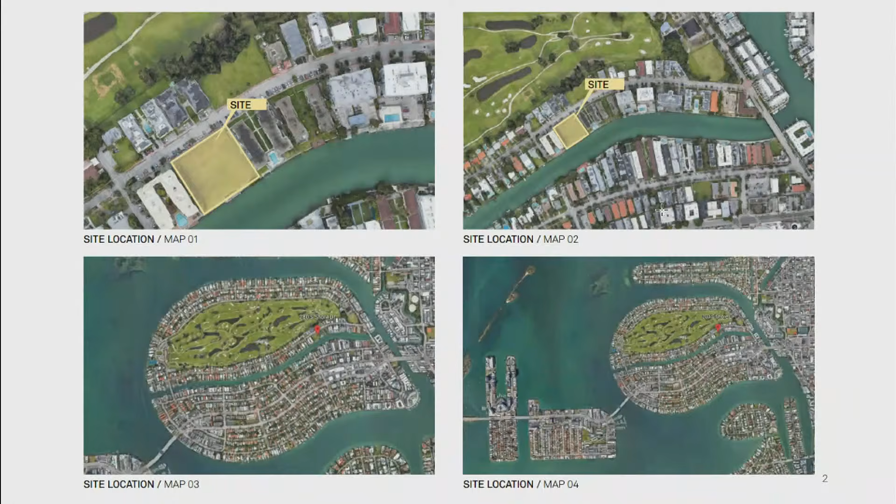So as staff mentioned, this was approved back in 2022. It is an affordable housing project located on Normandy Isle, very close to the golf course. One thing that's unique about this is that it presents an opportunity - affordable elderly housing, waterfront, with modern amenities - which is something people don't really get the benefit of often. Here you see a little bit better where the location is. And I will let Jeffrey walk you through the project.

One thing I do want to point out is that this is the most significant investment in affordable housing for our elderly population in almost 50 years. Based on the data I was able to review from the Miami Beach Housing Authority, the biggest affordable housing project for the elderly was built in 1979 - the Rebecca Towers, about 400 units. In the almost 50 years since 1979, we've only been able to add about 60 more units. The Vista and Breeze projects combined offer 119 affordable housing units for the elderly. So this really is the most significant project we've done for our elderly population.

And it's a modern, contemporary build. It's an opportunity for people who would otherwise be priced out of the city to continue to live in their communities in a very dignified manner. This is a very important project, and I'm very proud to be representing them today. And with that, I will hand it over to Jeffrey to talk a little bit about the design.

Thank you, Madam Chair, board members. Jeff Huber, principal with Brooks Scarpa Huber Architects. I'm the architect and landscape architect of record on this project. The building is carefully thought about around all of its edges, around all the open spaces. I can get into a lot of the details, but we did work with FPL from day one to design this - the issues came about when the inspectors came on site. The building was designed as a public-private partnership, as Cecilia mentioned, with the Housing Authority of the City of Miami Beach. It's providing 70 permanently affordable homes for elderly residents who are going to be able to remain in Miami Beach and invested in their community.

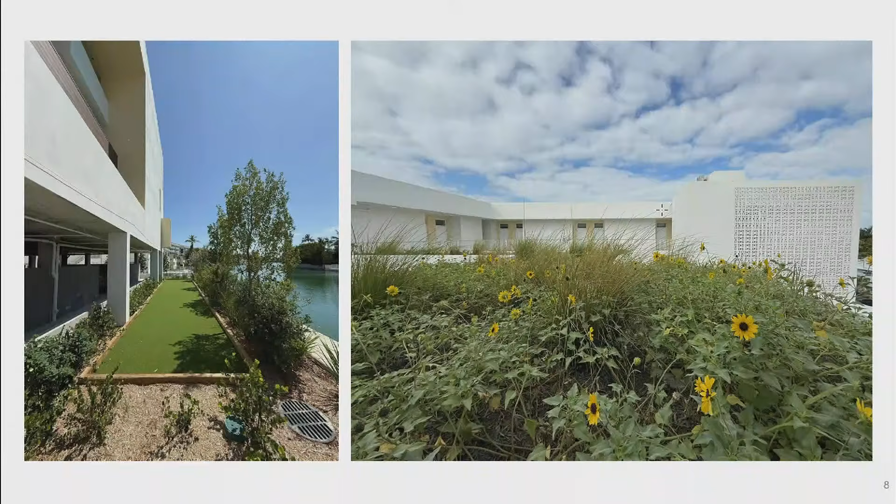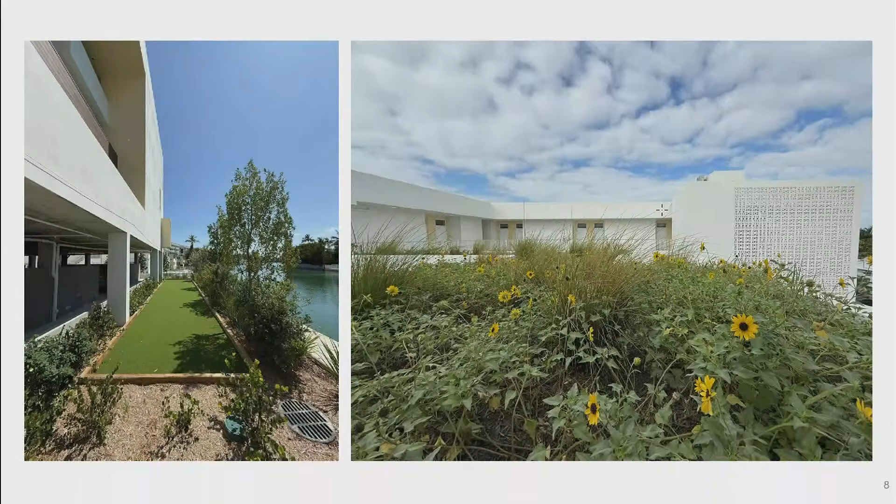These exterior spaces are also equally important. Courtyards, shaded walkways, gardens, and seating areas create places for conversation, rest, and recreation, and the landscape includes drought-tolerant, salt-tolerant species, pollinator planting, and habitats for native flora. These spaces support both environmental performance as well as physical and mental well-being of the residents.

So the project does advance a lot of the city's goals, and I'm going to hand it back off to Cecilia to talk through those.

This project directly implements some of the goals and policies in the city's comprehensive plan, which encourage the development of affordable housing. Other policies also speak directly to providing housing to our vulnerable populations in proximity to transit, which is exactly what this project is doing by bringing 70 affordable housing units here in Normandy Isle, with the sister project totaling 119.

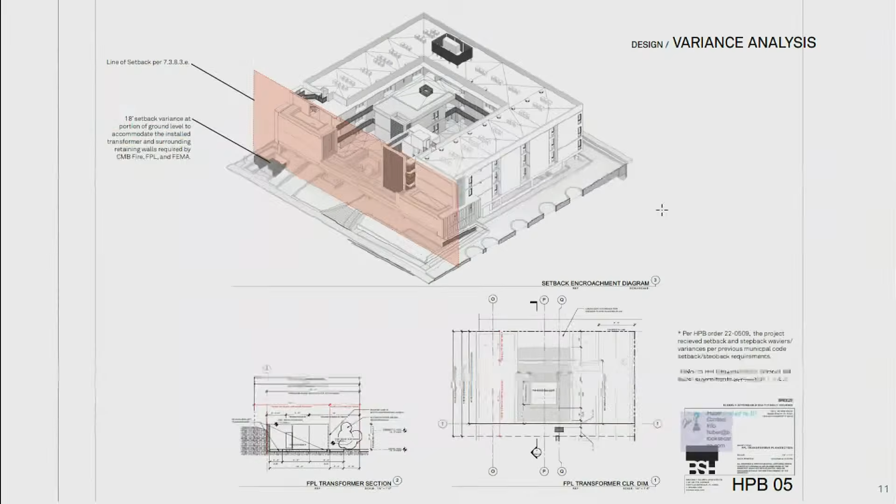As I mentioned, this was already approved by the Historic Preservation Board, and as Debbie mentioned, it's not uncommon for projects to come to you in a conceptual stage. As we get into the permitting process and architects start paying closer attention to other codes such as FEMA, FPL, and Florida Building Code, things shift around, and that's exactly what happened here.

By the time the encroachment was detected, we were weeks away from TCO, and relocation of the vault was simply not feasible without substantial demolition of this just-built project, which would delay delivery of these affordable housing units even more.

I will also mention that this team went above and beyond to mitigate visual impacts of the FPL vault. For example, FPL doesn't allow plantings in front of the vault, since it has to be accessible at all times, but Jeffrey was able to convince them to allow low-scale plantings in front of the vault to mitigate that visual impact. Of course, if FPL needs to access the vault, those plantings will need to be trimmed down and replanted, but it really does make it so that any potential negative impact is mitigated.

So this project is a PNC Bank. We're located in Miami Beach. It's about a 5,000 square foot project on 1011 Fifth Street, Suite A, Miami Beach, Florida.

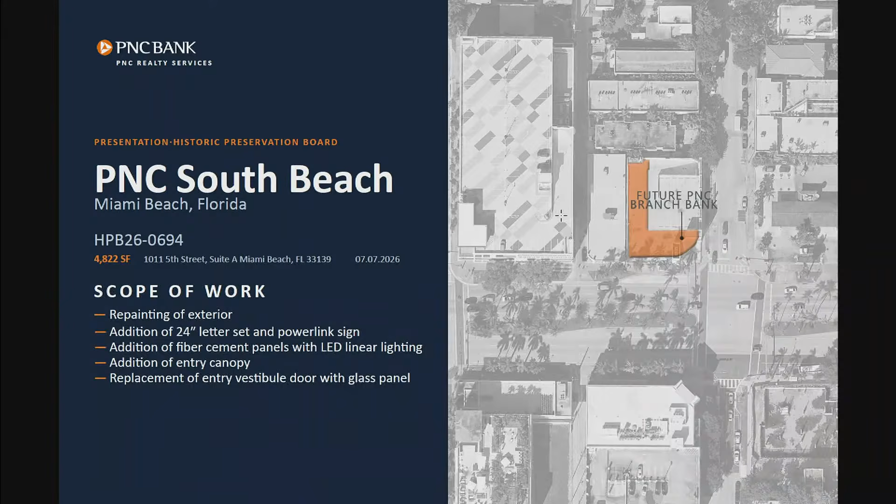The scope of work, as previously mentioned, is composed of repainting the exterior, the addition of a 24-inch letter set sign and a power link sign, the addition of fiber cement panels with LED lighting, as well as the addition of an entry canopy, and replacement of the vestibule door with a glass panel.

Within our letter of intent, we explained the summary that Giselle went over earlier. The project includes an exterior facade improvement for the PNC Bank tenant space. We are located within the Ocean Beach Historic District. The existing building is a non-contributing commercial structure, and the intent of the proposed work is to refresh the tenant frontage and improve the pedestrian entry experience while maintaining the existing light white appearance of the building, while introducing durable and coordinated facade design elements consistent with the PNC Bank brand and surrounding context.

To recap the scope of work: we're removing the existing signage framing, which we'll see on the exterior elevations we've put together. We'll be repainting the exterior in white, adding new fiber cement accent panels along the vertical fins throughout the building, and proposing LED linear lighting in orange, consistent with PNC branding. There will be new exterior wall sconces and a new architectural canopy at the primary entrance with updated PNC tenant signage and illuminated signage elements, as well as replacement of the entry vestibule door with a glass panel.

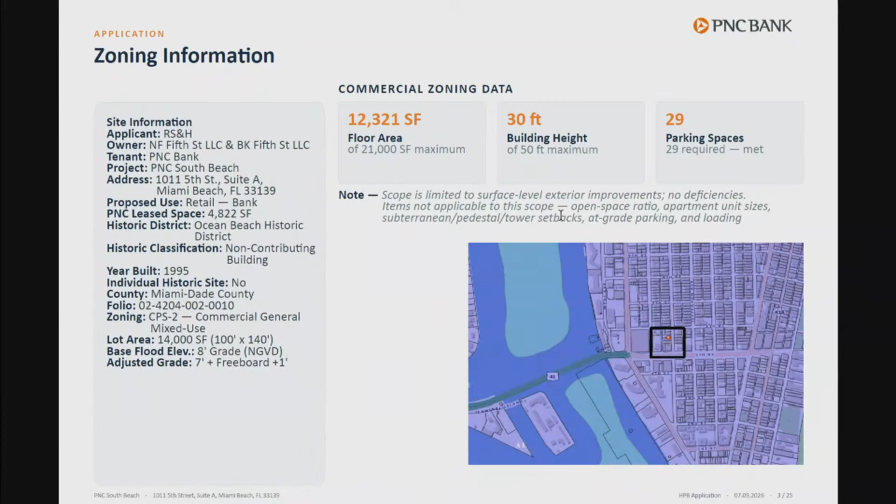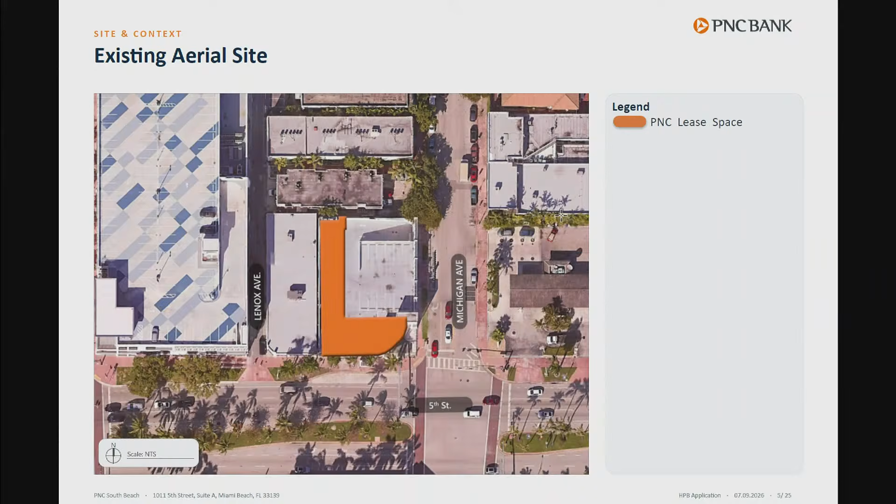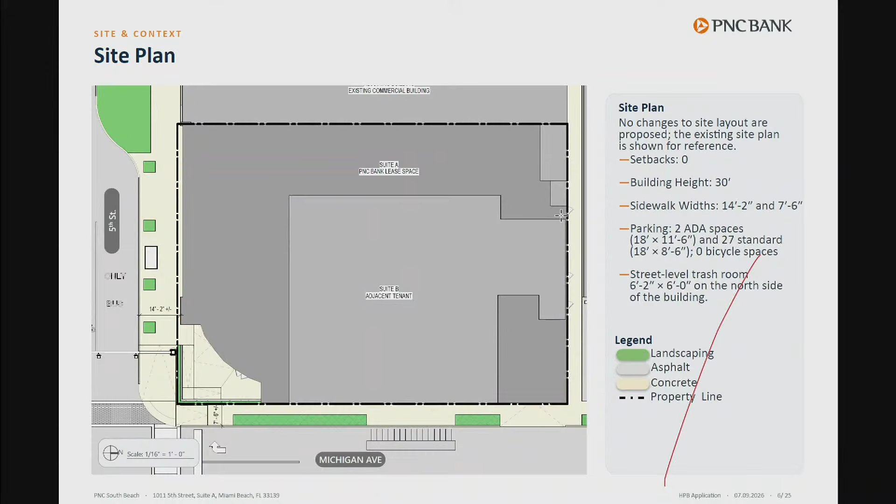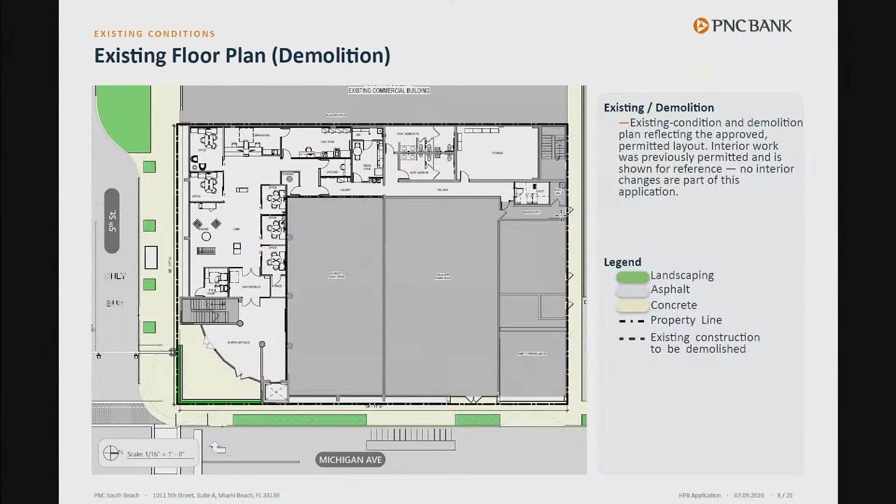This is our existing floor plan, showing existing conditions and the demolition plan reflecting the approved permitted layout. The interior work was previously permitted and is shown here for reference. As previously mentioned, this is approved and currently in construction for the interior portion of the building as shown here.

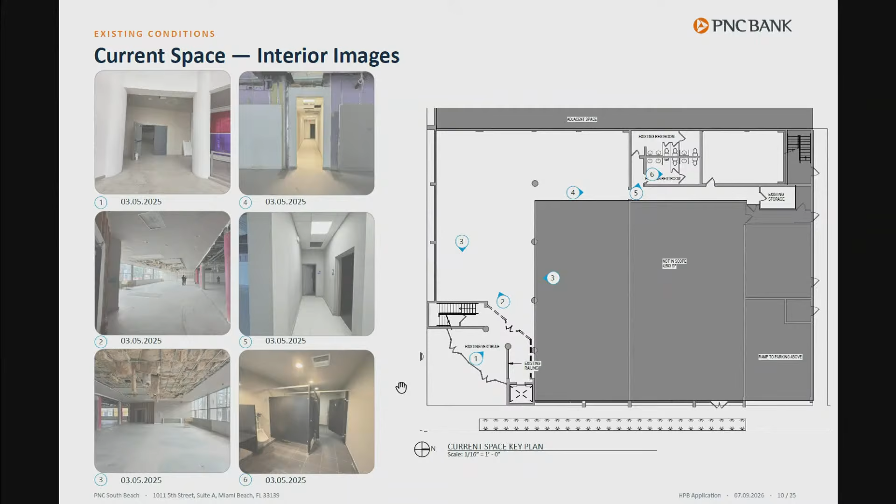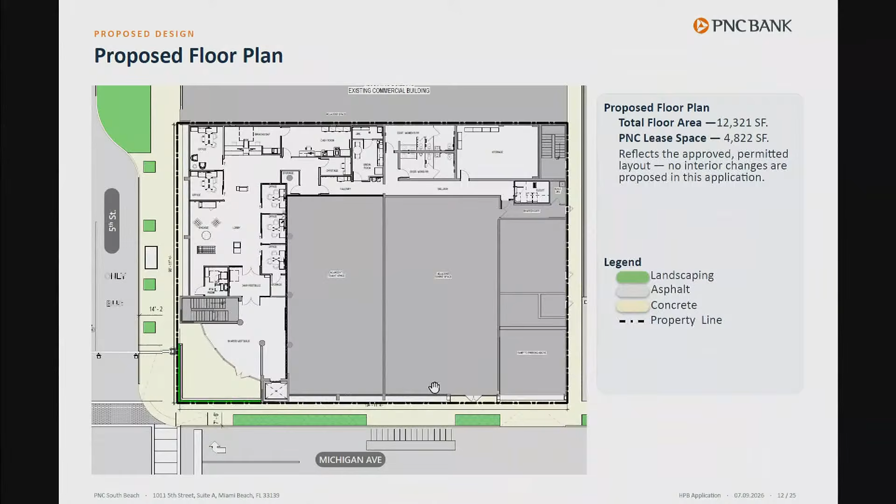Right here is our proposed plan. Again, there's not really any changes being proposed here, just reflecting what has already been permitted.

Some existing exterior images of the surrounding context, showcasing how some of the surrounding buildings generally maintain that light or white primary facade and have some of those darker accent colors and materials being used throughout the areas and storefronts for these sites, and showcasing how we are trying to mimic the same idea for the PNC Bank within their brand colors.

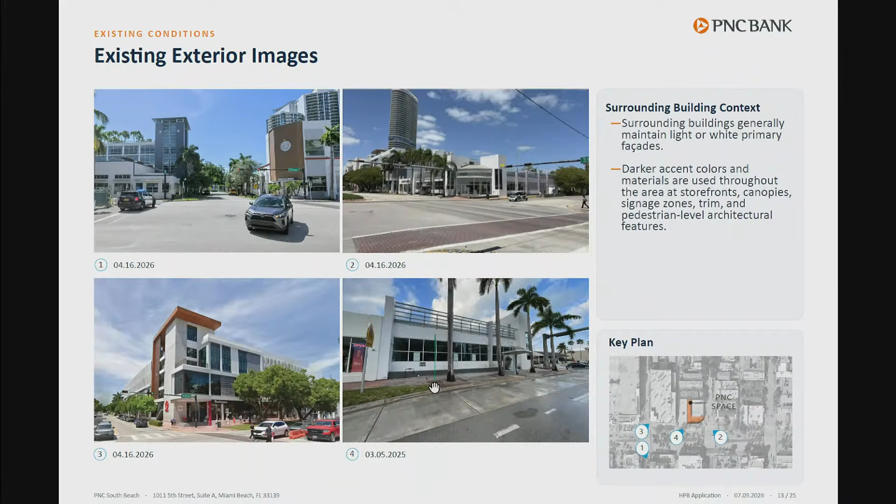Here are proposed exterior elevations. On the south facade, we see the addition of the fiber cement panels in that dark charcoal color along the vertical existing fins, and then the integrated lighting in the orange color representative of the PNC typical marketing logo and colors. And then we see the 24-inch letter set on the new architectural canopy and the 4-foot diameter Powerlink signage as well.

Currently, as we have this application submitted, we are proposing for those fins to go to this side of the entry, if you can see my cursor. We had been recommended in the past during our pre-application meeting to try and investigate the possibility of extending that treatment of the facade throughout the remainder of the building, and we have discussed that with the landlord, and he's agreed to let us do that. So we do have updated elevations and renderings that show the look of that, so that the entire building can have a more cohesive look.

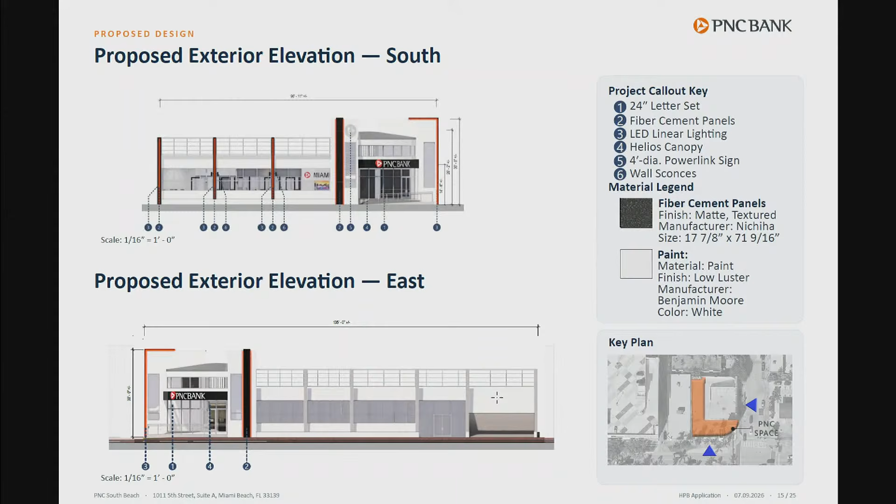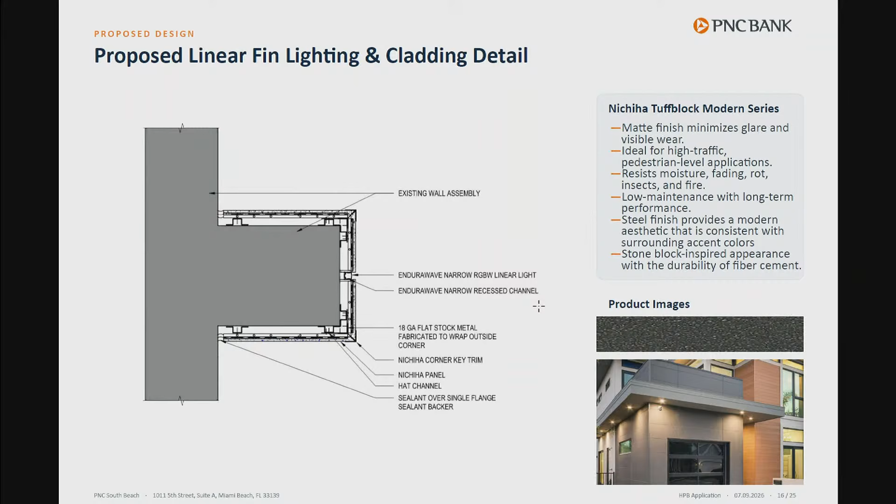Right here, we included a detail of what we would be doing within those linear fins, adding that cladding detail and lighting within it, and some of the material properties of the fiber cement panel we'll be using. We're going with a matte finish, which minimizes glare and visible wear. This is ideal for high traffic pedestrian level applications, which is our case here. It's resistant to moisture, fading, rot, insects, and fire. It's low maintenance with long-term performance. The steel finish provides a modern aesthetic and is consistent with the surrounding accent colors. And the stone block has an inspired appearance with the durability of the fiber cement.

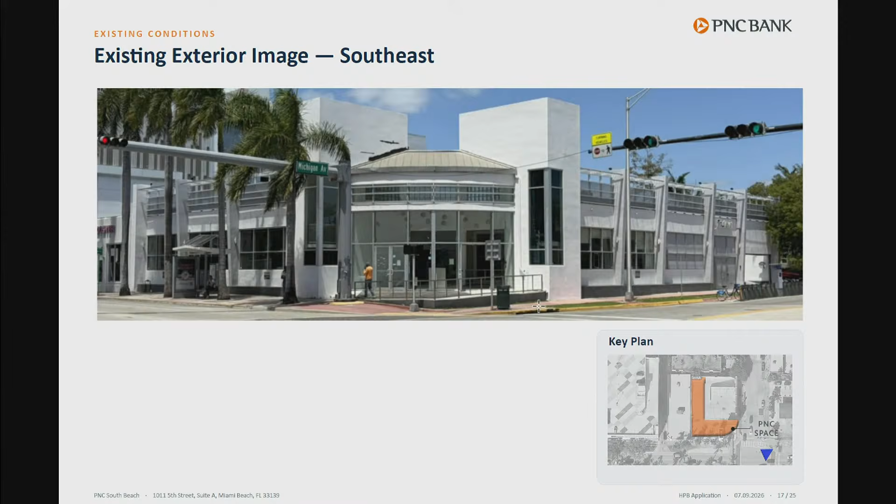Lastly, we have some exterior images here. This is our southeast corner and what it looks like today. This is a daytime render view of what we are proposing in our current package. This is a nighttime view where we see those LED lighting come to life a little bit more on the building. This is a south view here. This is an existing exterior image of what it looks like today. Daytime render of what we're proposing with those vertical fins and the lighting, the canopy as well, and then a nighttime render of what that would look like with the LED lighting as well.

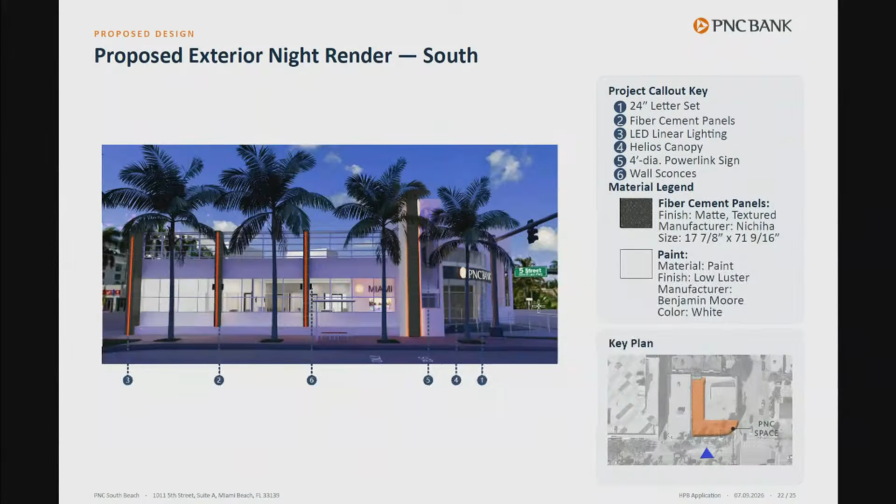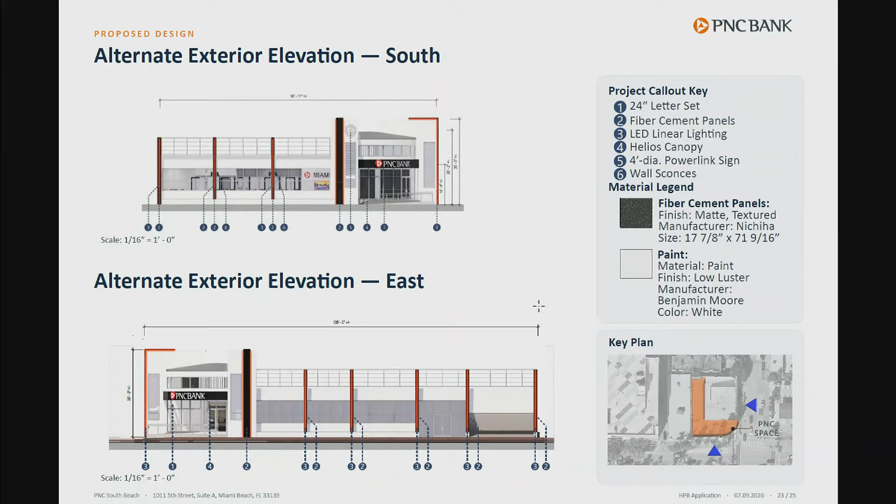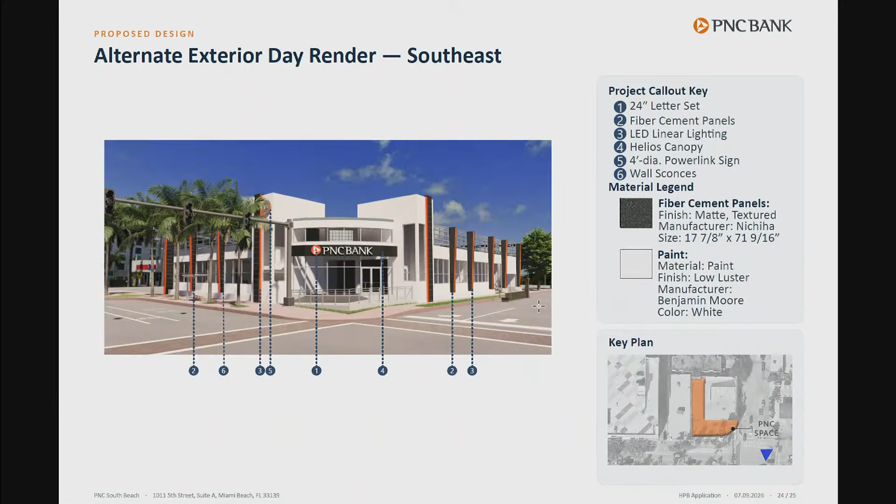Lastly, we have included here that alternate option that I mentioned a little bit earlier after having discussions with the landlord after we submitted our final set for the application. We did discuss with the landlord extending the same treatment throughout the entire facade. He was amenable to that, so we have included this alternative option to extend that throughout the entire building to make it more cohesive. This is the preferred option now, so we ask that the board consider this as well. We've included some exterior renderings of the daytime here of what that would look like if both sides had the same treatment, and then we have our nighttime render here.

I'd like to welcome any questions or any comments that the board may have.

Does the board have any questions for the applicant?

Go ahead. Could you please explain a little bit? So when you have the fins, it's kind of clear how you're wrapping it around, but where we have the staircases, how are you creating the illusion of a fin there?

Yes, we have... sorry, and then I have one more question. Okay, the black and the orange that you showed there, will the surfaces be painted those colors, or is the orange just the color of the light? It's just the color of the light for the orange.

And then in regards to the question about the vertical fin along the stairs, we have not fully developed those details yet, but we would be creating some sort of elevated or raised detail that separates it from the building so that we can include that linear lighting behind those panels. We're still at a conceptual stage with it, but we can certainly develop that further.

Okay, and then the black will be painted black? The black part is the Nichiha fiber cement panels. Correct, but they will be dark? Yes, there will be a dark charcoal gray. Yeah, that's what I was trying to understand. All right, and we do have physical samples, if the board would like to look at those that we have brought.

Those are our fiber cement panels that we're proposing here. Yes.

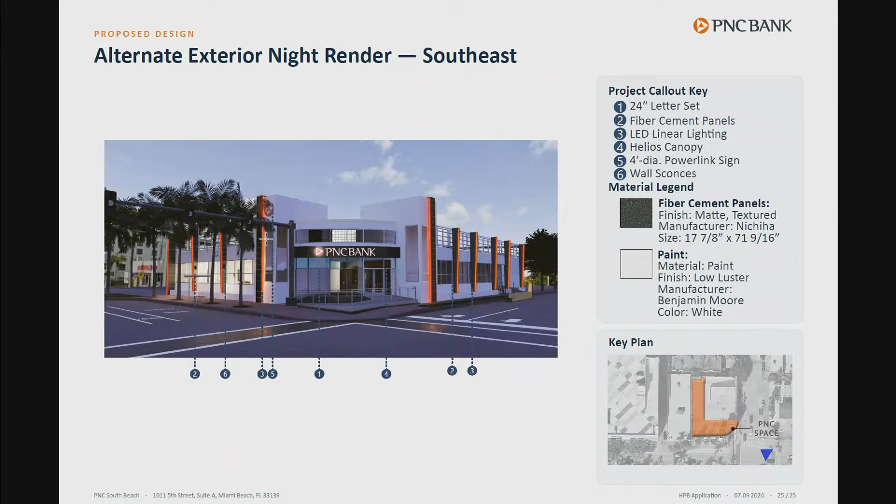Do we have any other questions for the applicant? No. And do we have anybody in the audience or on Zoom? Are there any ex parte disclosures? Do we have any disclosures?

Okay, Madam Chair, we do have someone on Zoom with a phone number ending in 5600. Oh, I apologize. We can take that. Go ahead.

Good morning, board members. Meg Lusto with Miami Design Preservation League. We concur with the staff recommendation to approve the proposed modifications. The scope of work consists of relatively minor changes to the building facade, including updates to the branding color palette and the addition of limited signage on a non-contributing building. As proposed, these modifications are appropriate in scale and character and are not expected to adversely affect the architectural integrity of this non-contributing structure. Thank you.

Okay, moving to Zoom, the phone number ending in 5600. Please state your name. Hello? Hello? Please state your name. Hi, my name is Cristina Vega. Do you swear to tell the truth, the whole truth, and nothing but the truth? Yes. Thank you, you have 2 minutes.

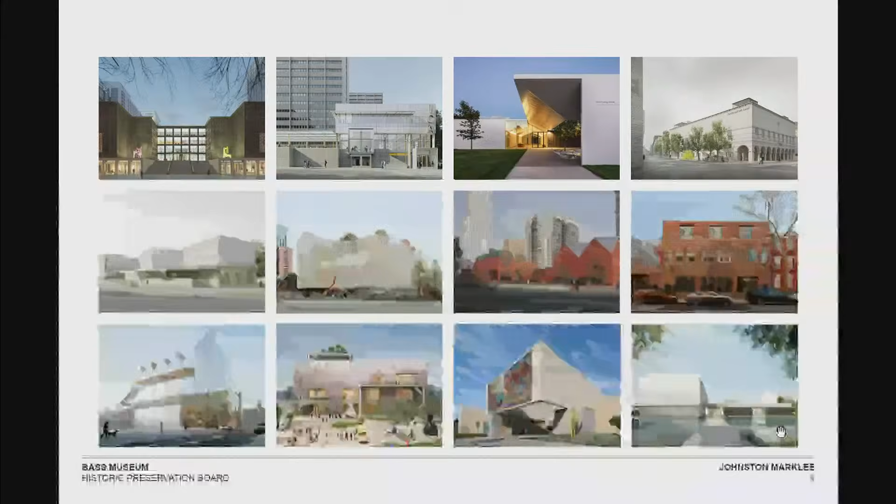And how this project fits into that lineage. Johnston Marklee is based in Los Angeles. We're also here with our team, Baron Bush, from Miami. Our work at Johnston Marklee is focused on the arts: new buildings, renovations, spaces for arts education. So this project for the Bass very much fits into the lineage of our expertise and interest in being here in Miami Beach.

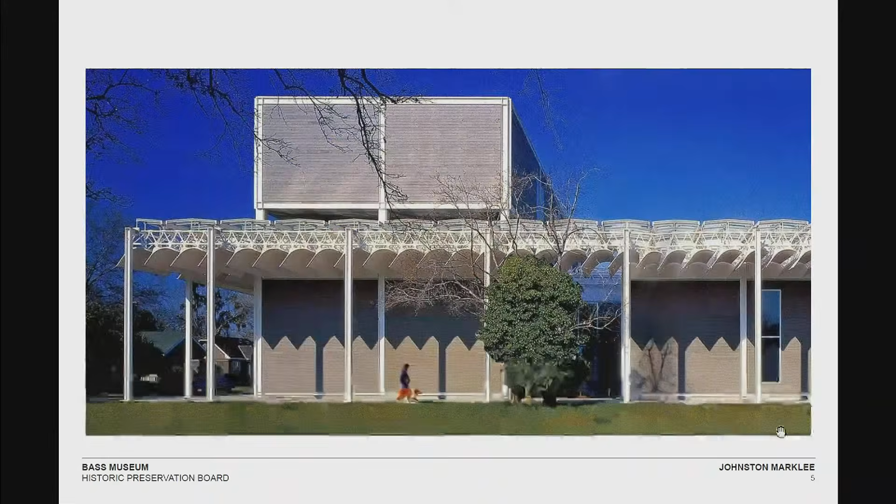The Menil Drawing Institute—a very similar climate, and in a way, a similar type of project, a museum in a park. This is a museum on the site of the famous Renzo Piano building from 1987 in Houston, the Menil Collection. For us, the relevance here is thinking about how to make a publicly accessible building that integrates landscape inside and outside and is very accessible to the public.

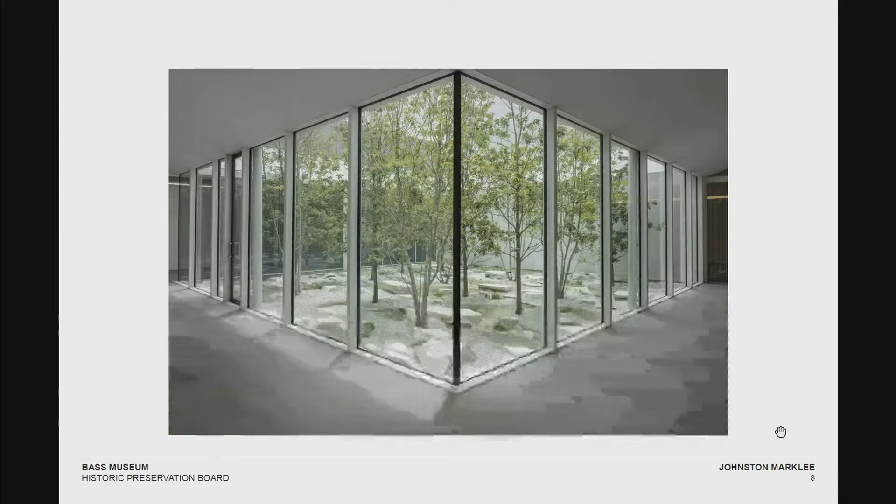This building, the Drawing Institute, is very accessible. It's a place for art, a place for gathering and learning, and it's centered around the integration of landscape. So gardens are central to how we design the building, and I think are inspiring our work for the Bass.

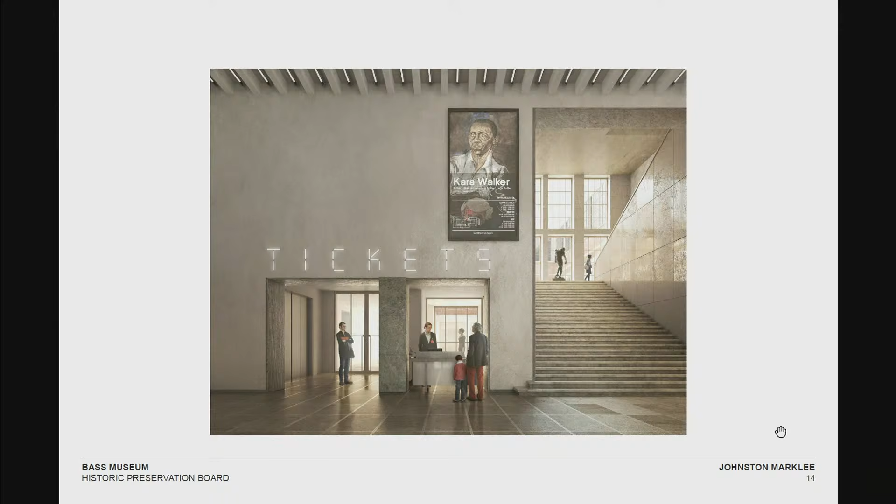Another project in Basel, Switzerland, a historic building of the very same year as the Russell Pancoast building. We're very comfortable working within the context of historic buildings, renovating this building, adding gardens, cafes, similar programs, thinking about how the public can move through these buildings in a more contemporary way in terms of visitor services, flow and accessibility. We're also renovating this building to bring it up to contemporary code.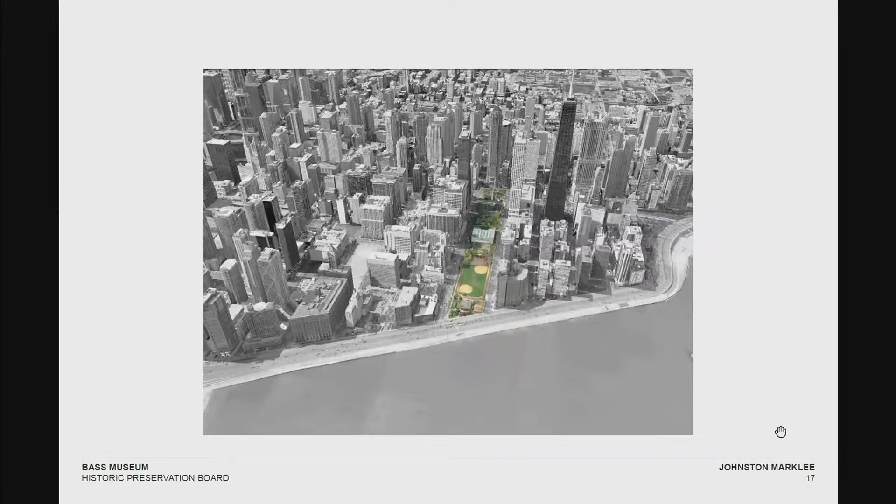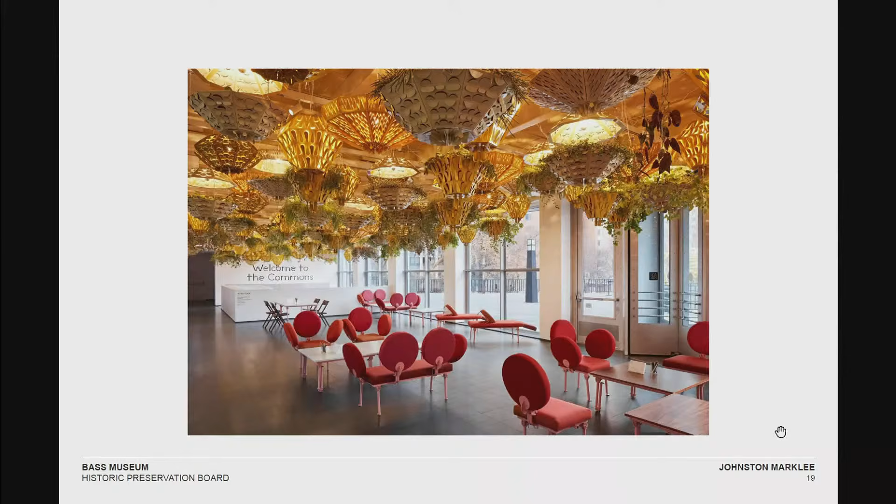In Chicago, we worked on the Museum of Contemporary Art. Chicago very much follows the tradition of the Bass, a museum in a park. This is a building from the mid-1990s by German architect Josef Paul Kleihues. Our project includes expanding publicly accessible spaces like this artist commons connected to the park outside, new circulation, and places for artist activation outside of traditional galleries.

Like this project, we worked on a master plan that re-envisions an expansion of the building, making the base more transparent and accessible, adding a wing centered around a new winter garden. And we worked with the artist Chris Ofili, reimagining these public spaces, working on color. Chris did a series of site-specific murals that we worked with him on in terms of integrating with the furniture.

At a university campus in Orange County, Chapman University, we created and expanded a museum. It's called the Hilbert Museum. It's at the edge of the campus, centered around a new courtyard that features this important mural from the artist Millard Sheets.

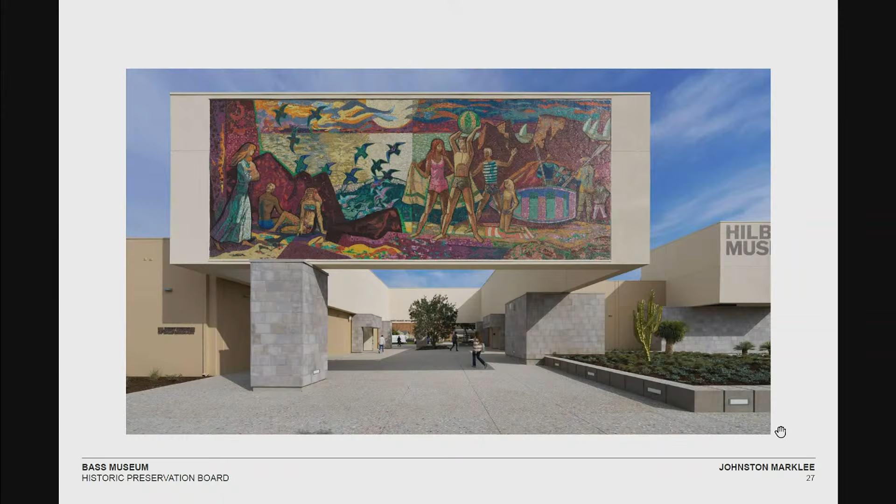So instead of adding square footage, we renovated these two buildings, and the new entry is a garden courtyard, much like the Bass. It's a very mixed-use space. It serves as the entry to these two wings, has events, readings. It's also a pass-through space, and it's fully open and free to enter.

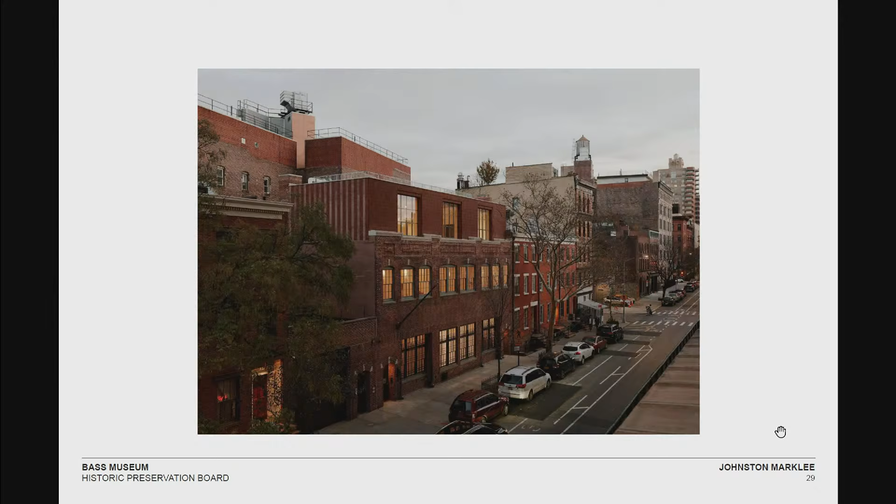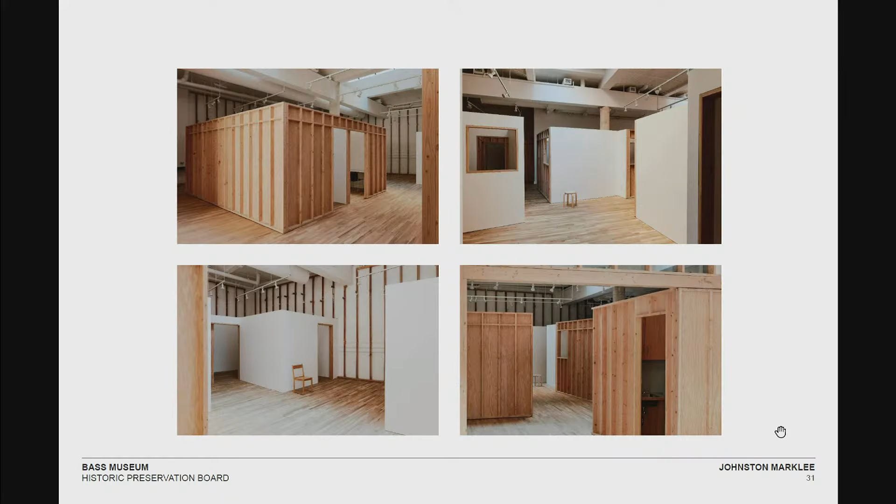For the Whitney Museum of American Art in New York, we renovated a former studio of the artist Roy Lichtenstein. It was bequeathed to the museum, and we made an artist studio addition. Working within the historic Greenwich Village District, we transformed these spaces into flexible, informal studios, and made an addition for an artist in residence. This project also included making the building fully universally accessible. So I think access is a really central part of our work here at the Bass.

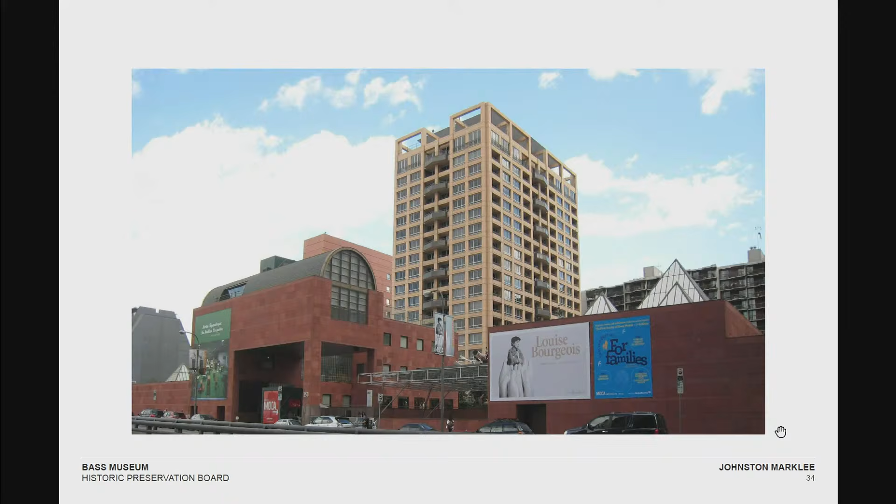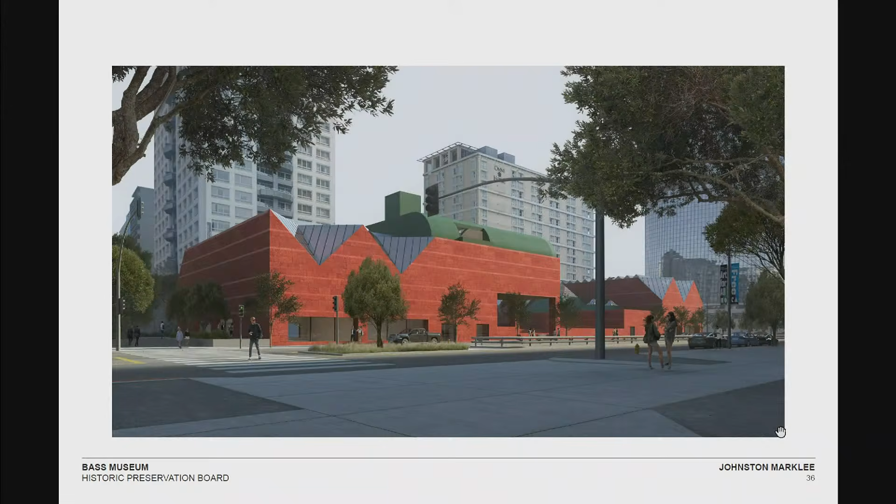Lastly, the Museum of Contemporary Art in Los Angeles, also a building by Arata Isozaki. We completed a master plan and addition proposal for this project. I wanted to highlight the importance for us of Isozaki's work, and understanding the historic context of his thinking was very generative of how we approached this design. Like the Bass, it has an important civic space, this courtyard, and the addition of new galleries really reinforces this public civic square at the center of the museum.

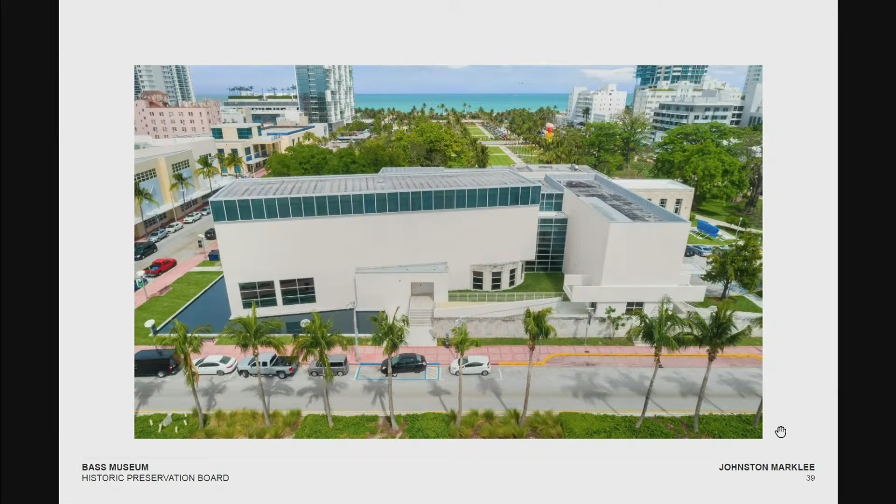So here is the Bass. This is the image as we see the building today. Just a little bit about the history of the Bass. Hopefully everybody's familiar with Collins Park. It's really a museum in the park. Collins Park is about 10 acres, and as Sylvia mentioned, the work you all have been doing with the Bass is really about imagining new activations in the park.

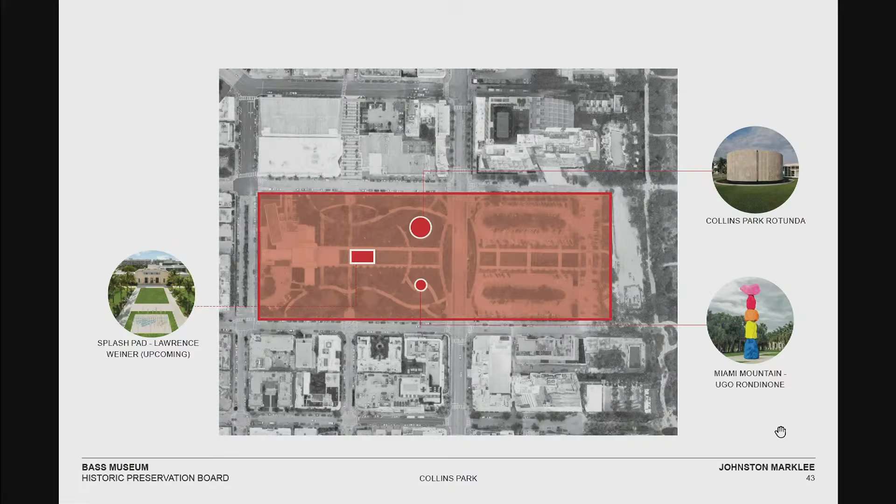The Rotunda was finished this year. Miami Mountain, and Sylvia has a plan for a splash pad coming in the future. So art in the park, art exists outside the walls of the Bass already, and also includes this beautiful Sylvie Fleury neon sign, Eternity Now.

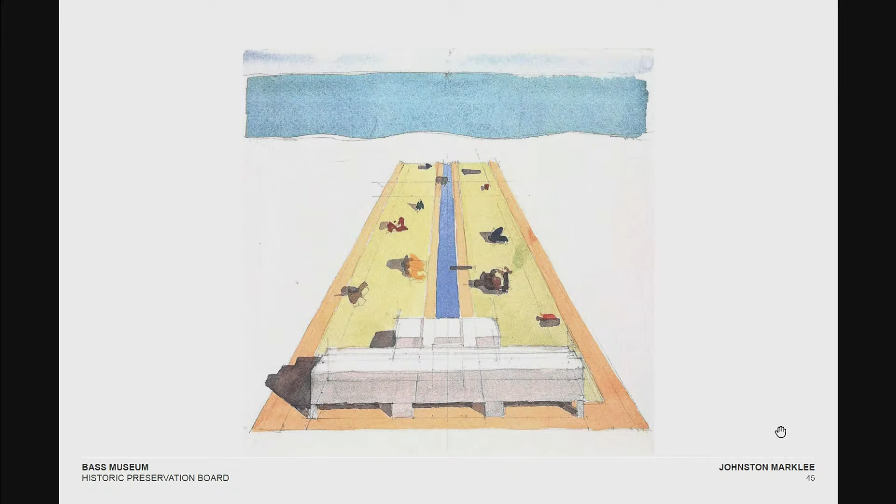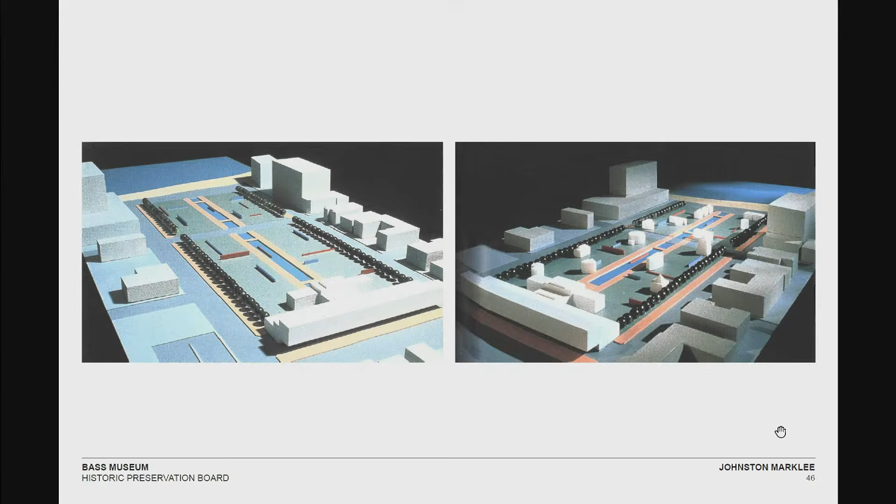So for the project, we looked back at some of the historic visions that Arata Isozaki had when he originally planned this project. It was about a very simple building and a specific way to activate the park with landscape and with artist pavilions. This was his original, revised proposal for the museum.

He really thought about these different generations of the museum, from the traditional historic room to a much more modern second generation museum, which is what the Bass is today. And in Isozaki's vision, future generations of art at the Bass were really about very bespoke, intimate ways that artists and audiences could come together, and that is the foundation of our vision.

So if this was his original plan, this is what was realized, basically half of that master plan. This was completed around 2001.

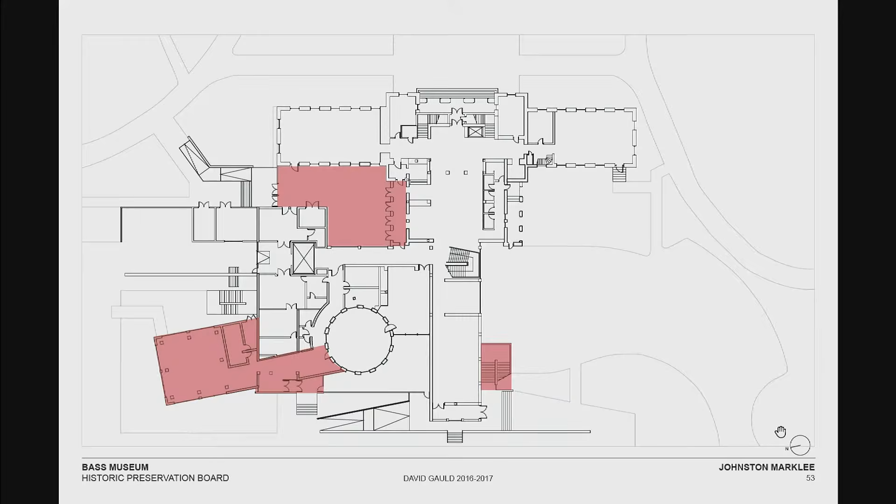Just a few contextual images to remind everybody. There was an open courtyard. Then in 2016-17, Isozaki's associate David Gauld came back and enclosed the courtyard, expanded the education wing, and made a few other interior modifications to expand gallery space and add circulation. So this is really the context that we're working on today.

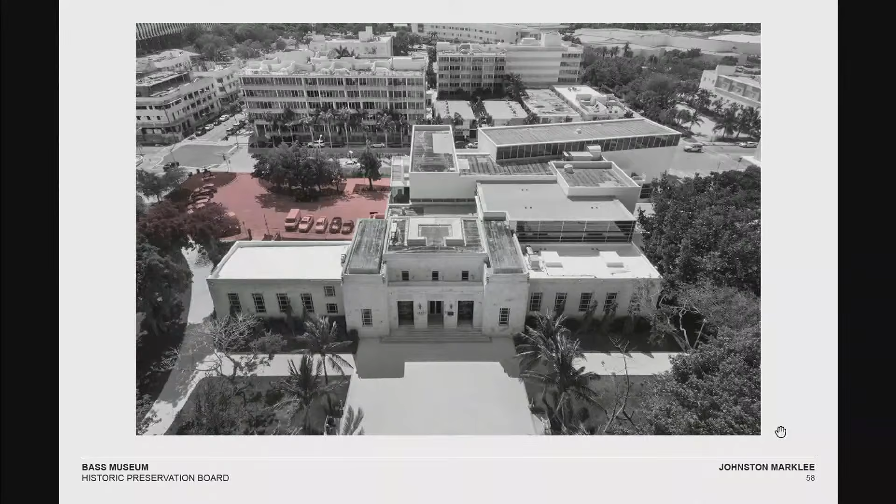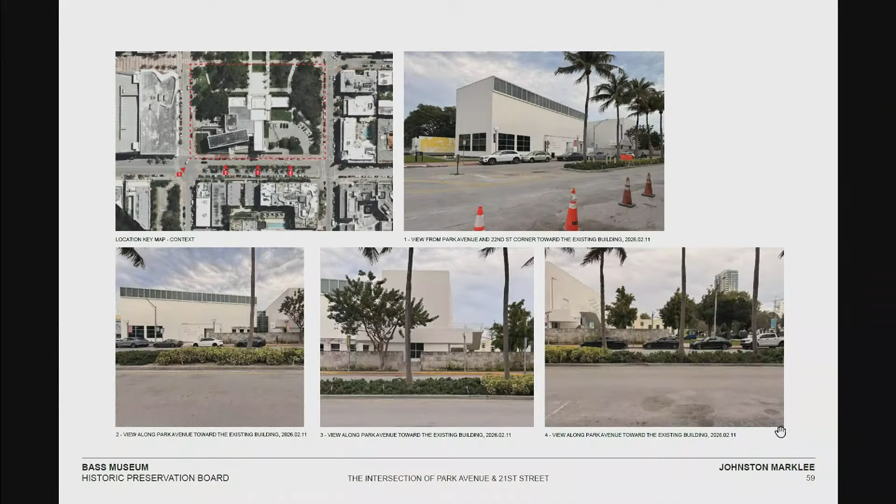So here's our proposed project. This is the Pancoast building looking west. Our site is there, as you all know, in the southwest corner of the site, the existing parking lot. Just a few context shots—I'll direct you to the lower right image, which is our site. It's an unbuilt, unrealized corner of the museum and a fragment of the overall park.

Looking south and north along the park is, of course, the hotel and then the dance school. So we're thinking about those kind of anchor buildings. I think it's worth noting that the way the corner comes together there, each of those buildings really marks that corner in terms of its architecture and massing. So we thought very much about how to address the corner in the way that we sited this new pavilion in relationship to the urban corner and also the park and the museum.

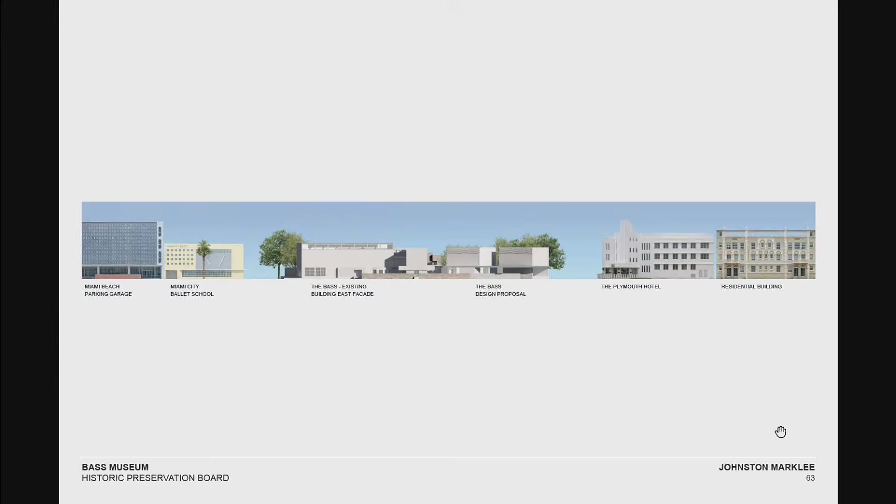We're keeping quite a distance from the existing museum. We're adding a new entry there in orange. I'm not sure if there's... this is the new, can you guys see that? Anyway, this orange piece, I guess it's not showing on the screen. There's a small addition to the Isozaki park. You can use the cursor on the laptop if you'd like.

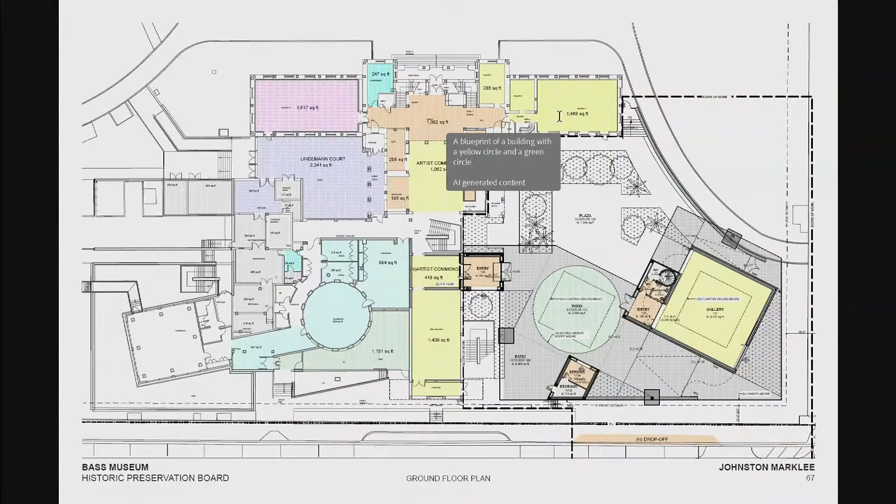Just to clarify, this orange piece is the addition to the Isozaki building, and this is the Pancoast. So we're not proposing any change to that through this project. Just zooming in a little bit, you can note that we're highlighting the date of the submitted drawing here. So this is what we submitted.

Going back to the entry, one of the additions or developments of the project since this is to expand that entry. We've consolidated for visitor services and flow, we've expanded that, and that will be our main point of kind of ticketing and such for the addition.

A couple of other quick highlights: this is Park here, and then 21st. We have two accessible ramps that lead you up to about a 12,000 square foot raised patio, which is at the elevation of the existing museum. So once you get up there, everything is accessible.

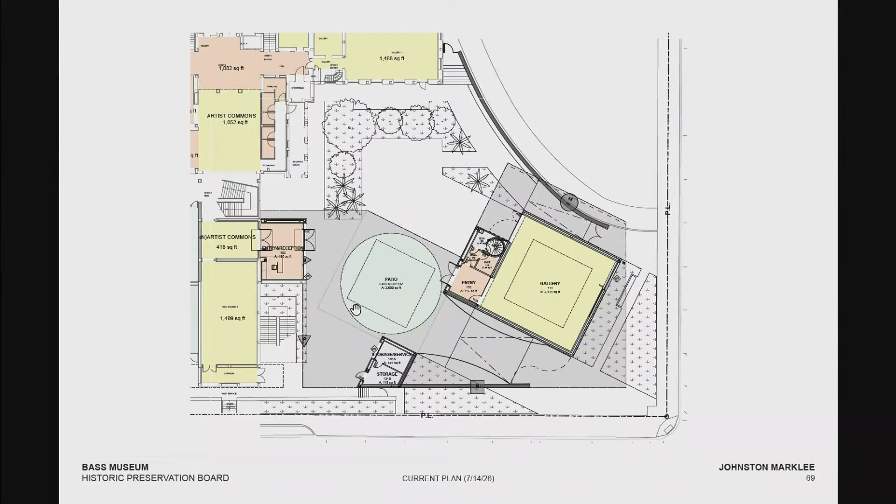Our project, the Yellow Square, is the new gallery. There's a covered kind of arrival porch that has top lit daylight, and then the gray outline is the covered patio. So our vision here is that once you get on site, you're sheltered from rain and sun, and that allows you to go into the new gallery and the existing museum.

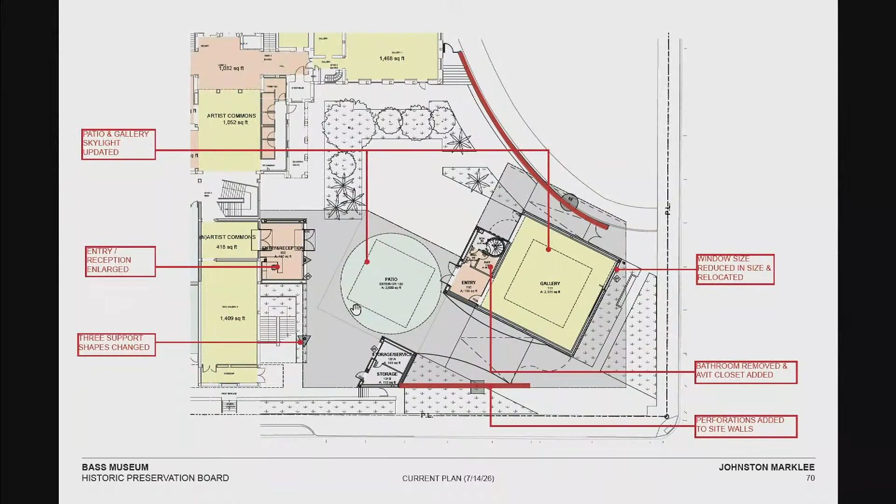A couple of changes to highlight: we've relocated the window along Park 21st. It's a smaller window, shifted a little bit to the east. We've removed a bathroom from our building. We've created perforations in the perimeter walls so it's more visually accessible from the street. We've, as I've noted, expanded the reception area and made a few other minor architectural changes that wouldn't really be visible at all to the public.

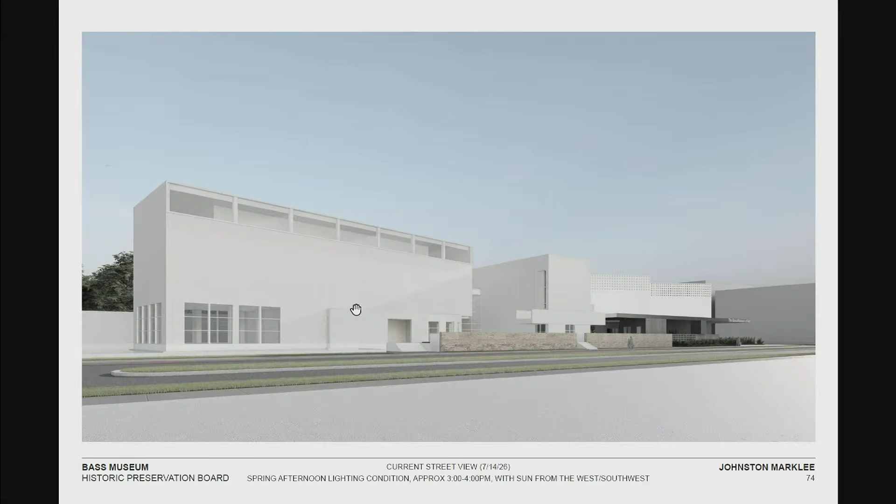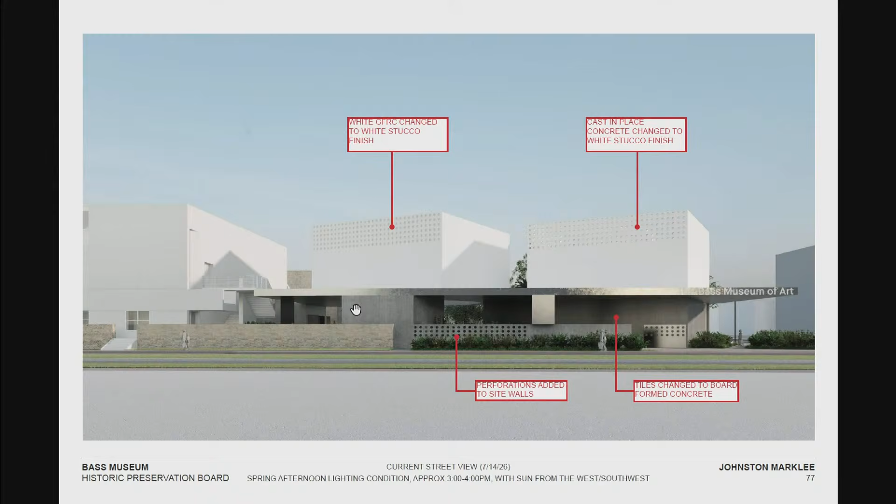We were proposing a little bit cooler, a little bit darker palette below that canopy to mitigate sun and reflectivity within the main inhabitable part of the project. So here, the upper volumes are now stuccoed. We're working very closely with the palette at the Isozaki building, so that very much mirrors the existing buildings. You can see the new perforated perimeter walls and the board-formed concrete of the gallery walls.

So this is before. One thing to note too is this window, which before was a continuous storefront window, and now that is a smaller opening. It's about a third of the size. We were just getting too much daylight into the space, and then some of the textures and materials below the canopy you can see there, and those are highlighted here.

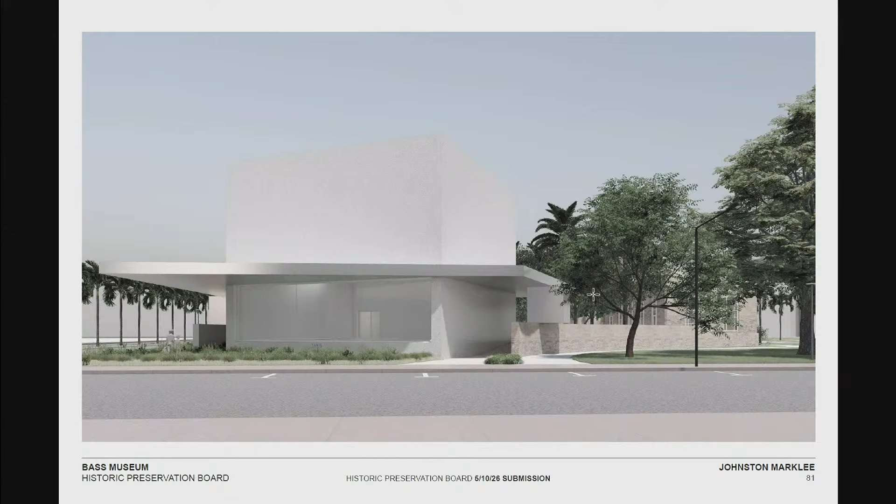Once again, now we're on 21st Street, so this is that second ramp behind this wall on the other side of the gallery. A little bit more quiet palette beneath the canopy, the stucco, and the window revision. This was the previous proposal, and now basically it reflects the new material palette, with a few changes in the landscape.

Another thing to highlight here is the expanded vestibule, which combines all of the visitor services in one location. So this is the new proposed design, with the expanded canopy, we've changed and highlighted the materials.

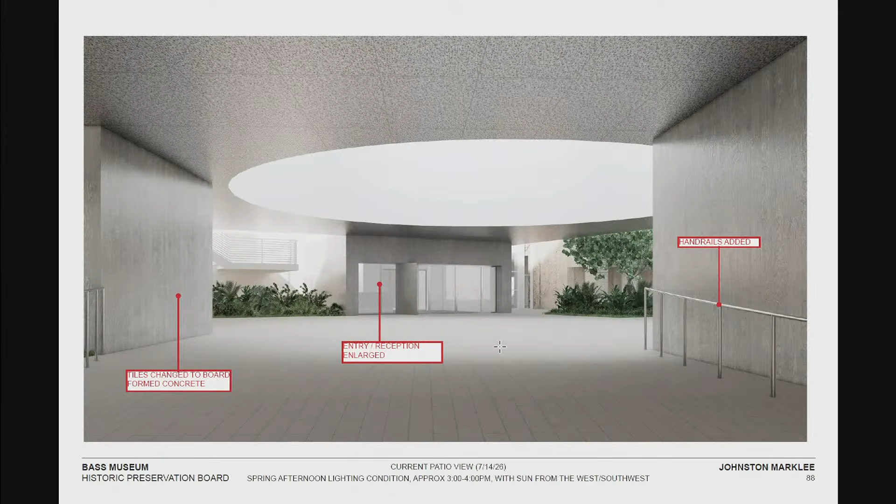This is a view towards the Pancoast building. We're simply proposing that the change here is about the garden palette that we're continuing to revise in terms of the plantings. It's a lovely relationship between the historic building and our project, with a lot of space between, and the garden becomes the elevation and veil between the two spaces.

And now we're out in the park. This was the proposal before. Once again, it's primarily just some evolutions of the landscape palette.

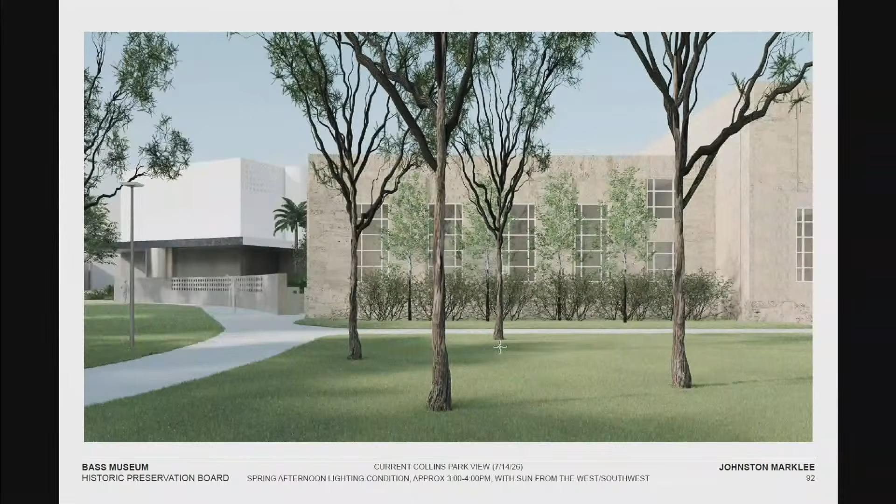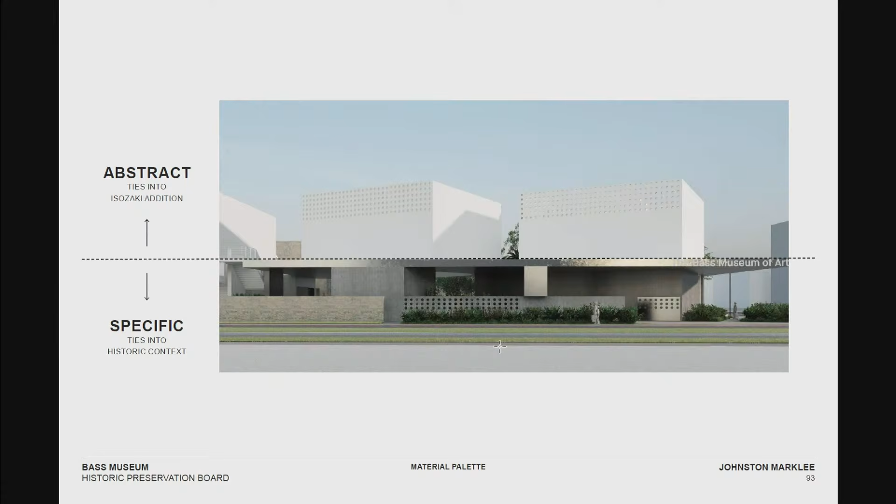So just one or two remaining slides about the material palette. Above the canopy, which at the street level is about 15 feet above grade, and when you get up to the patio, it's 12, everything above that is very simple white stucco, and then more textured and specific below. So those materials on the left.

Just really quickly, how much more time do you think you need? This is the last slide.

So it's a very subtle palette. I would say the differences have to do with texture and some tone, but we're really trying to harmonize with the different historic eras of the building.

Great, thank you so much. Thank you.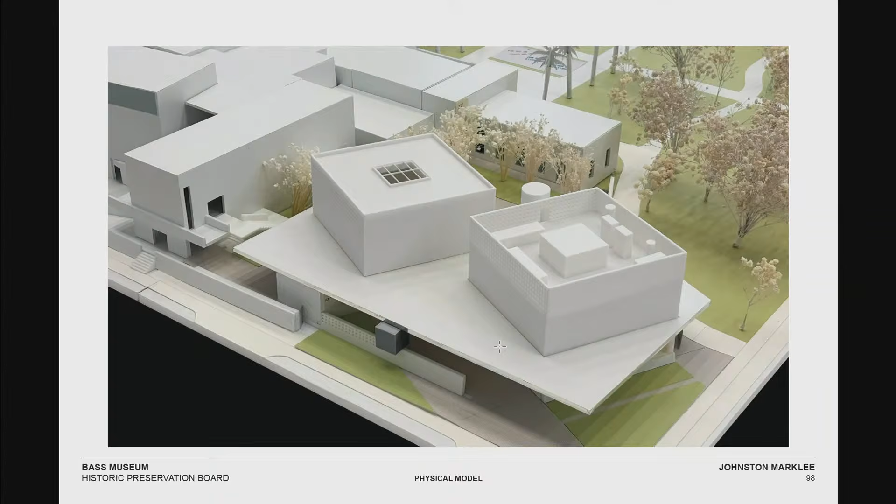Do we have any board questions for the applicant? Ray does.

Naturally, because it's Collins Park, I'm always worried about the landscaping. I noticed that you're taking out all the trees except for transplanting one, but you don't say where you're transplanting that tree. And also, I don't understand why you can't leave tree number 86. It's a nice tree. I believe, looking at the way this is laid out, you should be able to include that in your plan. Usually, whenever somebody is taking over something like this, they take into consideration the trees that are there and try to work somewhat around them. I understand why you can't save any of the others with the covering that you have, but I would like to know where you're transplanting the one tree and why you can't save tree 86.

Okay, and then the other thing is, is this a two-story building? It's a one-story building. Well, because at the height, you're showing it at the same height as the other buildings, and they're two-story, so I was wondering about that.

Yeah, thank you. I'll answer the second question about the height. We need a certain height to have clearance. We have about 18 feet clear inside the gallery, then some area for services, mechanical and lighting. The new HVAC equipment, the mechanical systems to support this building, are on the roof. It was important for us to not have it at grade. So the final parapet height is blocking that such that from the street, we did a lot of studies to confirm that wouldn't be visible from vantage points in the park or the surrounding city.

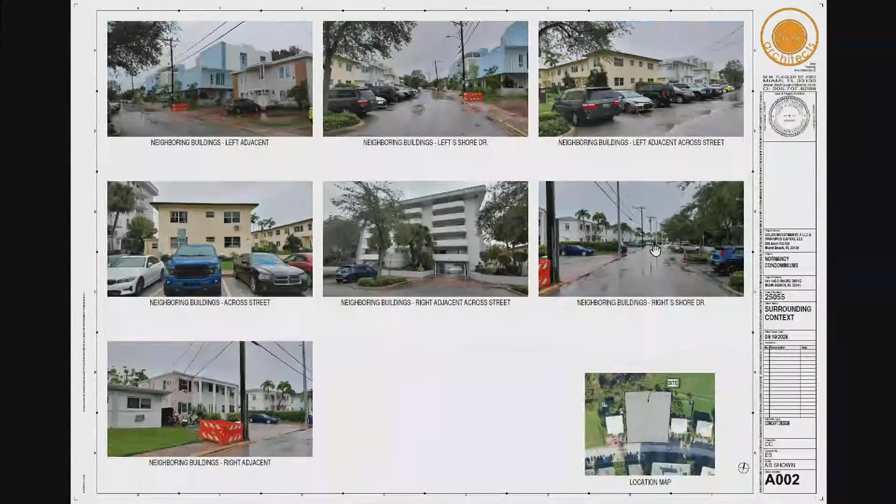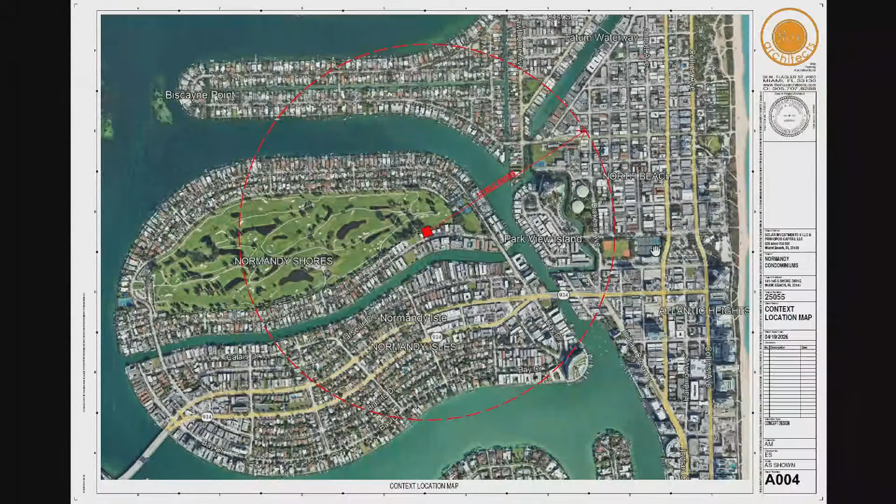Good morning. My name is Eddie Seymour with Flux Architects. I am representing the applicant for the proposed project on 141 and 145 South Shore Drive. Here on the screen, we're showing a map showing there are currently 2 existing 1-story buildings.

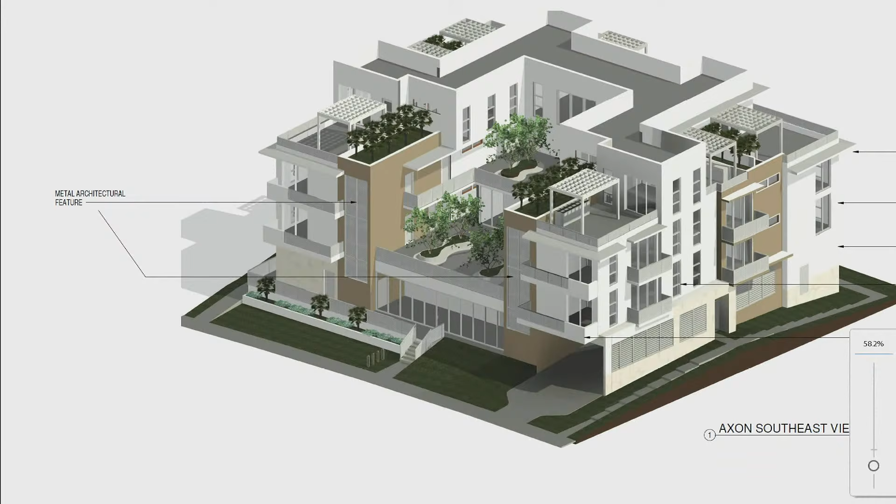Now I would like to show you some axonometric views of the building to further explain what's happening up there. This view from the front facade gives you a better understanding of the roof line. As you can see here on the front, we are respecting that additional setback.

For the residents in those upper units, we are providing some very nice, ample size roof terraces. Every single roof terrace would have a summer kitchen with a pergola to provide shading for the residents using those spaces.

We try to maximize the roof terraces as much as we possibly could. We just have a landing area for the residents of the units below to walk up to that space and then exit into the exterior.

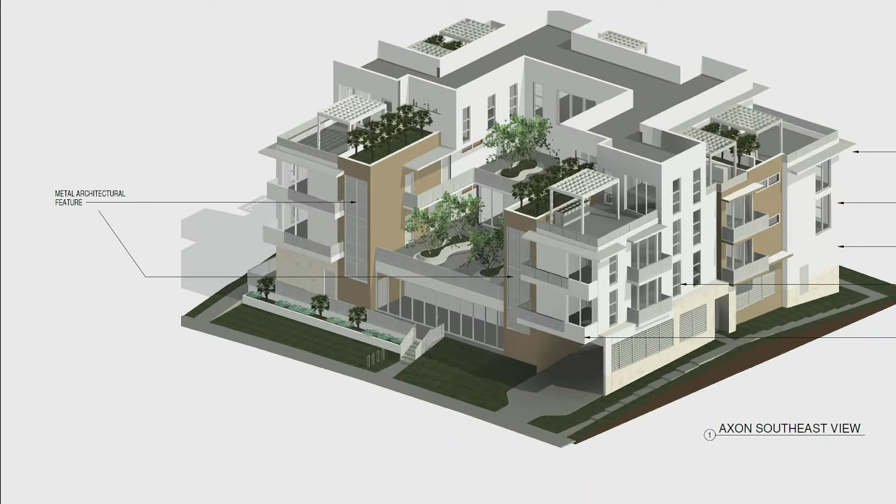On the very top level, we are providing a 4-foot 8-inch parapet to make sure that we are covering any mechanical equipment that would go up there.

And let me just continue through.

On that front facade, we are also providing the required front porch area. If you look at the bottom left corner, we are providing that, which is a requirement, so we were able to meet that requirement.

We also have a considerable amount of landscaping. We decided to provide a tiered approach, so we have landscaping at the ground level, and then a midway planter, about halfway up that porch area, to provide further landscaping in front of the porch, so it's not just a blank, solid wall on the front street.

Let me go back. I also want to mention that we are providing ADA access, if I can just get the right image.

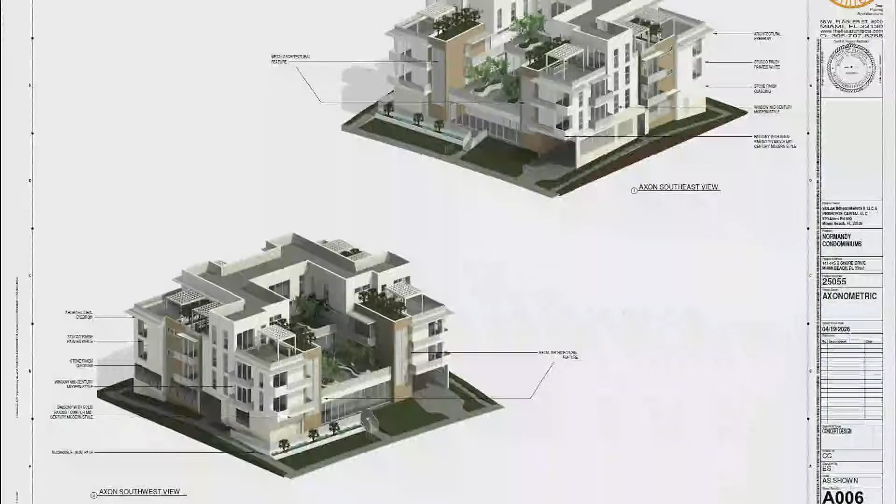We are providing ADA access from the street. On the west side, we have an ADA compliant ramp that goes up into the higher elevation of the base floor, so you have ADA access to the front porch and also to the garage level on the first level.

For the one-bedroom units, we're providing one stall, and for the two-bedroom units, we're providing two stalls in tandem arrangement, so all the units would have parking.

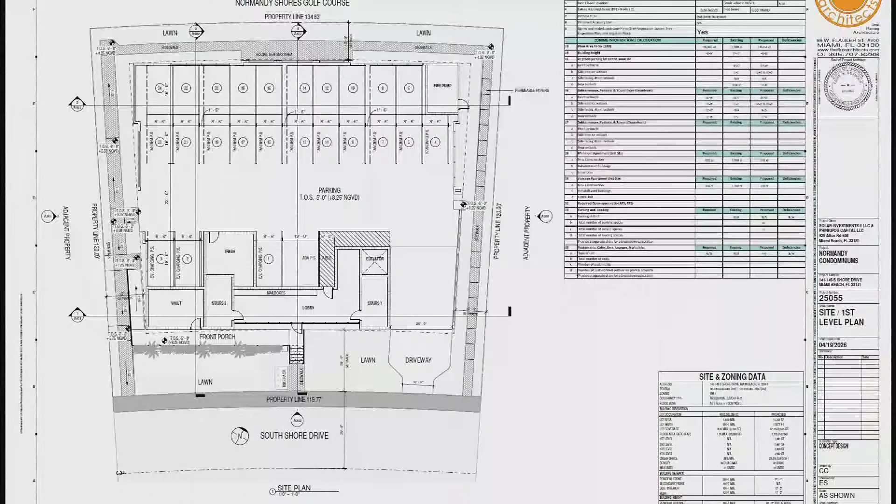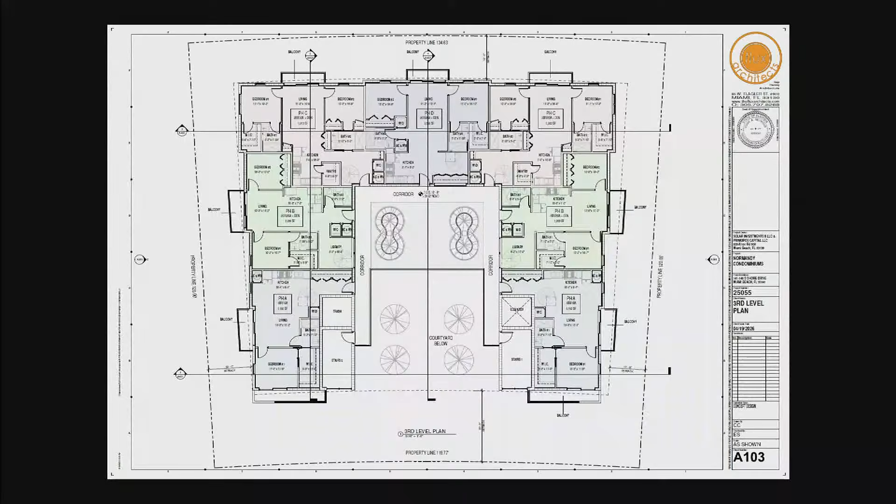Here we have the elevations showing the proposed heights of the building. I do want to mention that the maximum height allowed in this district is 45 feet, and we are slightly below that by 4 inches. We are proposing 44 feet 8 inches, going to the top of the parapet.

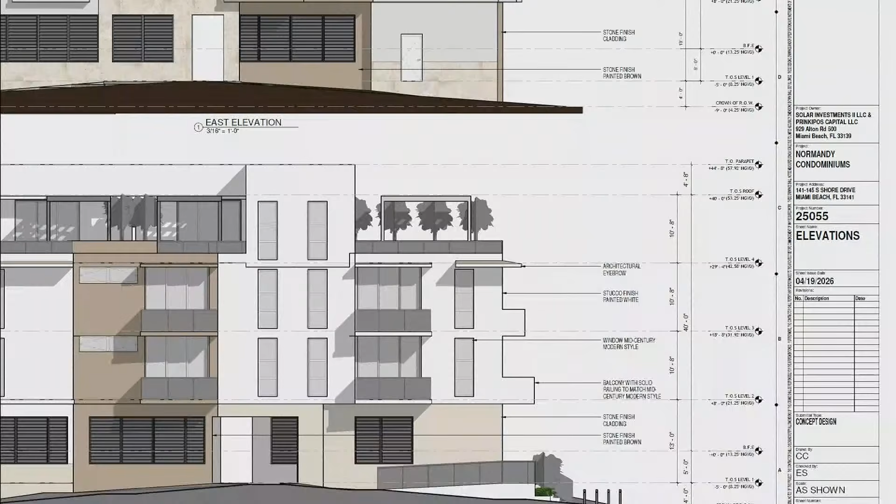And here we also have some sections cutting through the building at different locations, again showing that we are trying to respect the front street by setting back the building and meeting the required setback at the front.

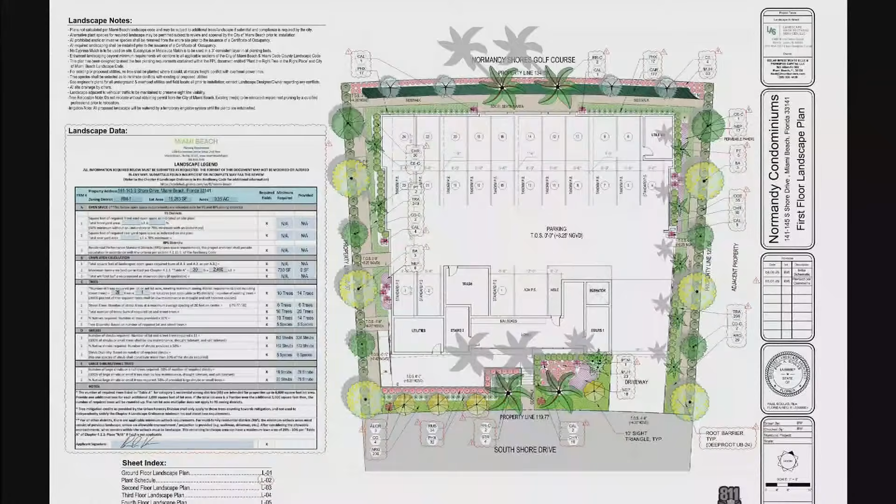We also have some landscaping plans. We understand that it's a very tight site, but we wanted to make sure we provided the necessary landscaping and meet the requirements, not just the minimum, but try to go above and beyond. So as you can see, we have a full set of landscaping plans with the legend, and we have a variety of different tree types that we are proposing, especially along the front facade, the street facade, to make sure we make that a very appealing net positive to the neighborhood.

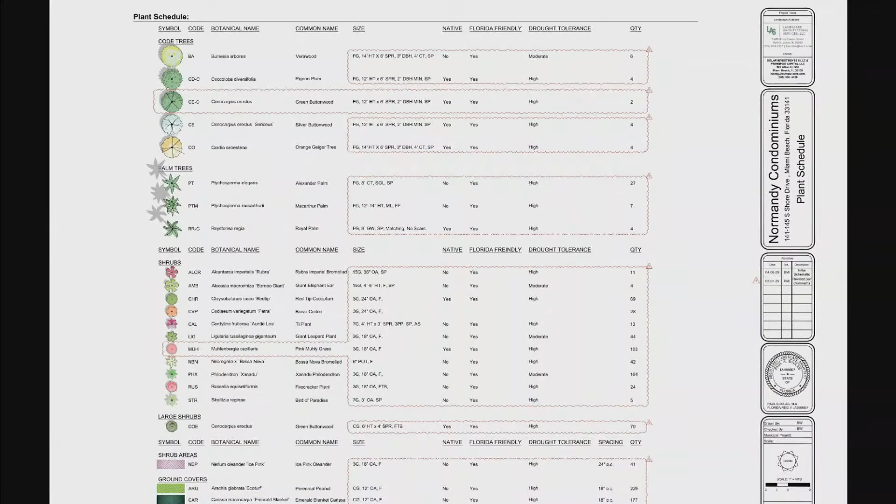Here we have that legend showing all the different vegetation that we are proposing. And we also show the plans for that courtyard, the third floor, and that roof level as well, where we have the roof terraces.

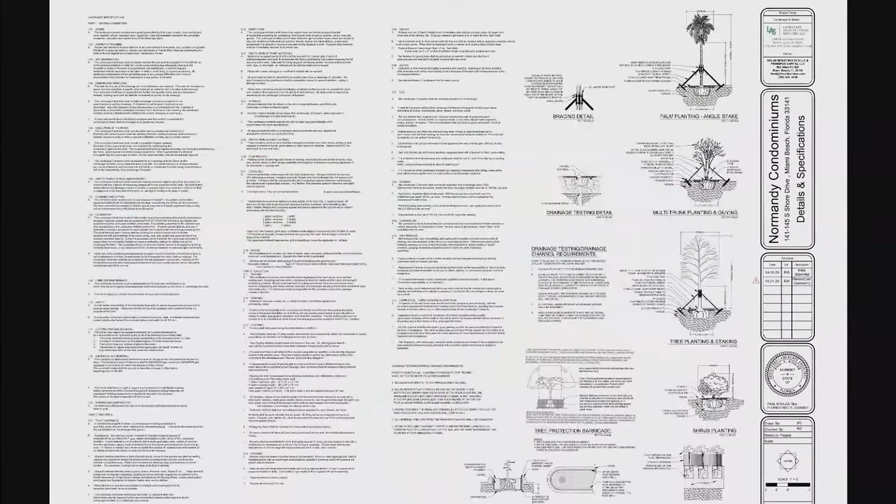So I think at this point I'd like to turn it over to you guys if you have any questions for me. Okay, do we have any questions for the applicant?

Do you have a sample of this railing material? Because it looks, in my opinion, almost like I'm in jail. If you have a sample we could look at, that would be really great. In your entrance, I mean, it looks like a gangway. It should be wider. Why aren't you bringing your front porch area all the way over to the end of the windows and having a wider staircase going up to the building? It's a beautiful building, and you've got this little narrow stairway going up to it, which I think is degrading to it, in my opinion.

Yeah, we can certainly make that change and make that improvement.

Randy, you have questions? Yeah, I second that also. I don't know if the renderings are inaccurate. Are all the windows dark tinted on the building? Because that looks like that in the renderings. Or are they just clear glass?

Yeah, it would not be a dark tint. It would be a light grayish tint, which was recommended to us by staff as typical of that architectural style.

Okay, it's just, on the previous comment, the whole entry area looks really negative because in the rendering it looks like dark windows, you can't see in. It doesn't look like the building has an entrance, I guess that would be my best statement. It's missing that feeling of where do you enter? Is it covered, protected? It's completely exposed. It has no canopy. I think the whole entry could be a lot more attractive and be consistent with the two side pieces, which are also very nice because they reflect the style of what was there. So, okay, I think your entry area needs work.